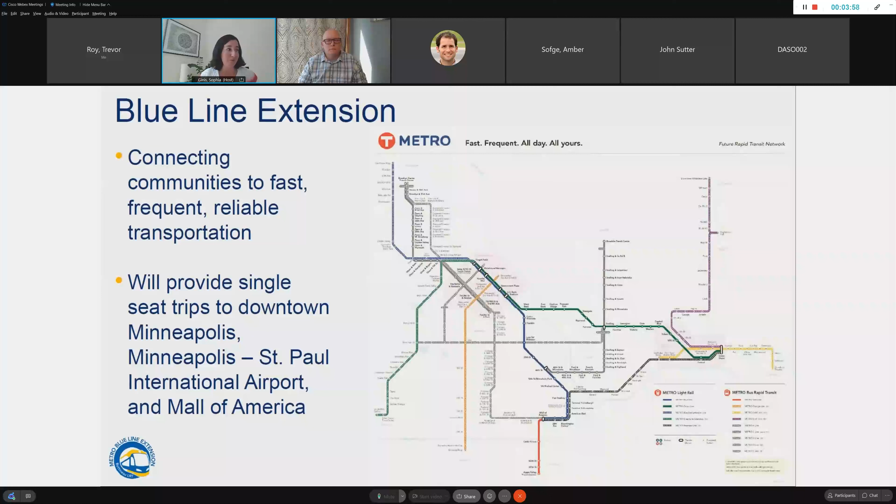Right now, we're in the process of identifying a community-supported alignment that'll take through the rest of the year. Beyond that, we'll continue to have many conversations with the community. We'll have an environmental process, develop construction-ready design plans, and do additional engineering. Then there'll be a few years of construction, 3 to 4, before we open the line. Our goal right now is 2028.

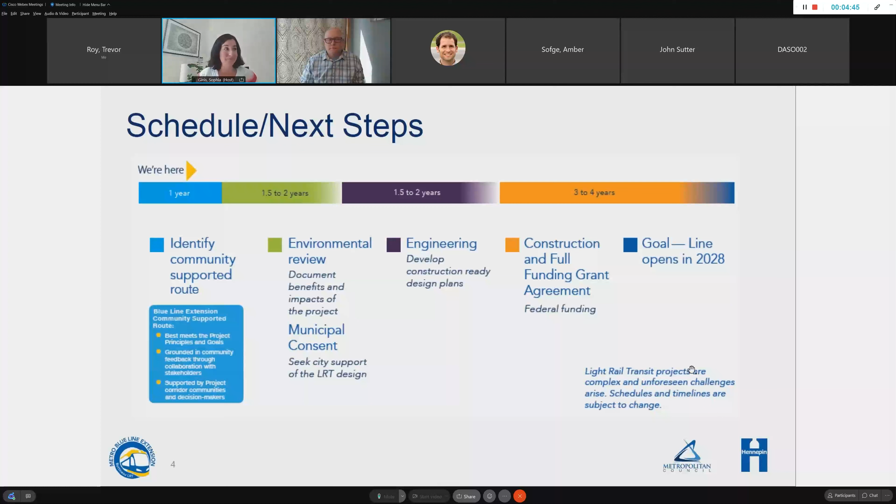So this is the beginning of a discussion to get into much more detail as we go. I'll run through a little bit about our proposed station locations before turning it over to Nick to run through our visualizations.

Just to put a little context right now, this is our first blush at the best locations for stations. We want to continue to have many conversations with the community as we specifically site these stations, and then we'll refine them as we further develop design and get into all the details of these stations and station areas. So expect ongoing conversations with us. As you see these locations, ask: do they feel right? Is there anything missing? That's part of the discussion we're reaching out to community for today.

So the stations that I'm about to show, to site them, these are some of the things we took into consideration: previously planned stations, feedback from community stakeholders. We have an interactive map online, and people gave us a lot of locations they were interested in. Obviously key destinations, something we've been asking about for some time. And then spacing - light rail needs some spacing between stations, half a mile to a mile, and figuring out how all of that fits together.

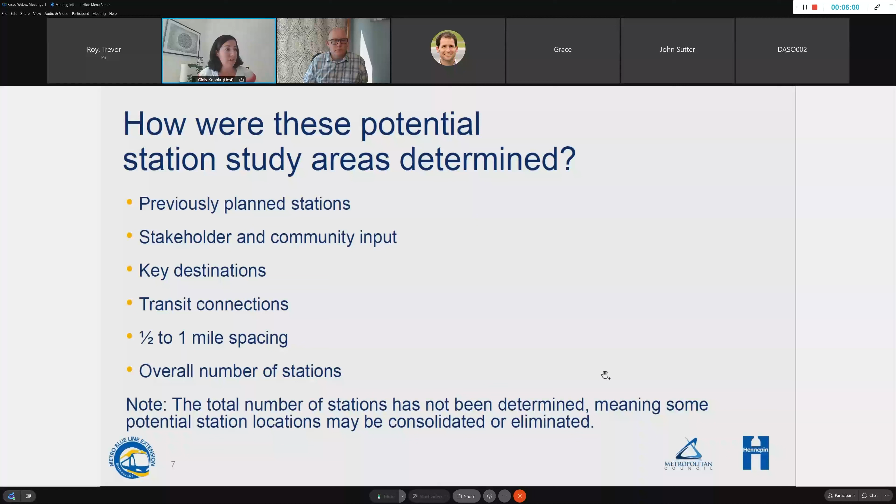So with that, in Brooklyn Park, basically our stations as designed can remain. There are 4 stations that were part of the previous project that can remain part of our current version of the project: Oak Grove, 93rd, 85th, and Brooklyn Boulevard.

As we get into Southern Brooklyn Park and then enter Crystal and Robbinsdale, the previous alignment here is in gold, and we can stay fairly true to some of these station locations - serving a major park and ride at 63rd, a vibrant business district in Crystal, as well as downtown Robbinsdale.

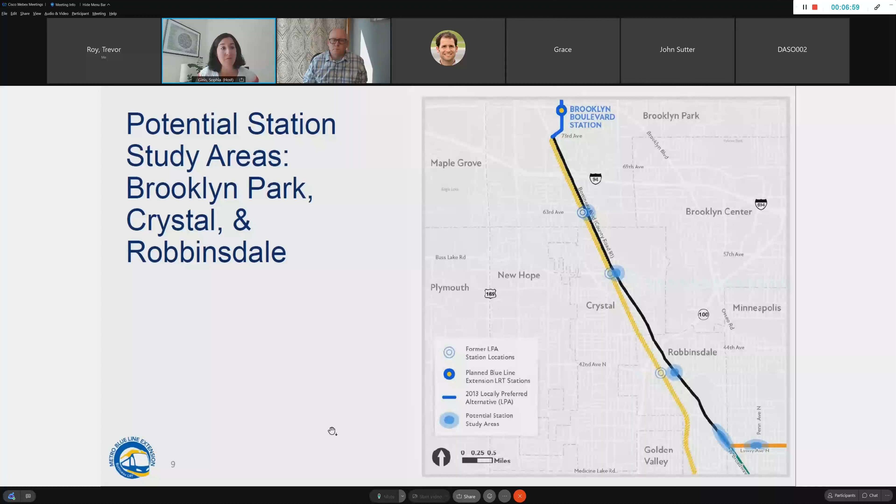One of the things we heard the most in our past project was the desire to serve North Memorial Hospital, a major destination for both hospital services and clinical services. This station at the southern portion of the line really connects folks to that amenity and to that regional destination that many people are going to, both in terms of employment and services.

Getting into Minneapolis, we have 2 route options. One is along Lowry Avenue to Washington, and another is along West Broadway with various linked options of how we would travel to West Broadway from Target Field.

There are many places that help us connect, thinking of both the C line and D line connections, as well as where these stations are placed, which tend to be very big business hubs within the neighborhoods. So thinking of where people are going, where they want to get, and the best places to potentially place stations - that is the same when you get down to the Plymouth area. There's a little hub of services and businesses and awesome places to go.

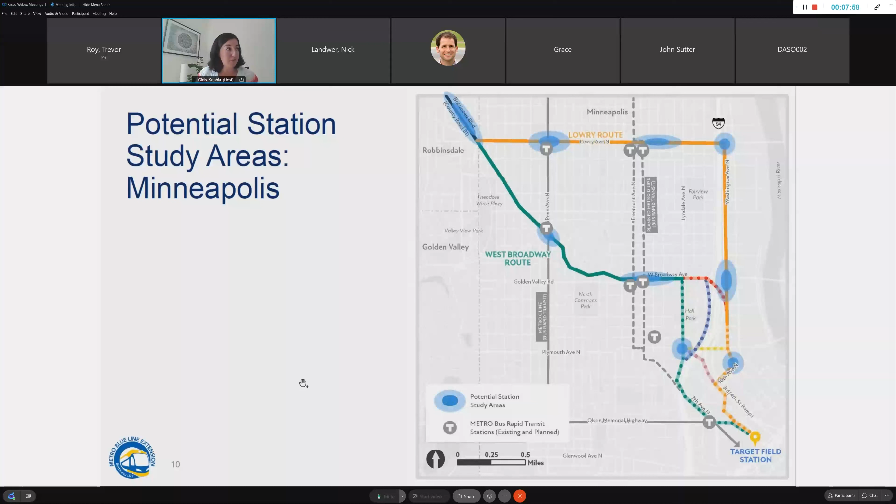With that idea in mind, this is what we're putting forth first to get folks' feedback on. As we move forward, we'll weigh these station areas against our project principles and goals. There are a line of things that help us guide our overall work, including continued public engagement.

Obviously, engineering plays a factor, like we need kind of tangent track to place a station. They're about 300 feet long. And obviously, the population's destinations and job access is one of our number one things. We also look at available right of way and where we can place stations to have the least amount of impact for the greatest positive impact, and what future land use might be around these stations. So as we place them, we kind of place them in areas that have a little bit more density and could continue to in the future.

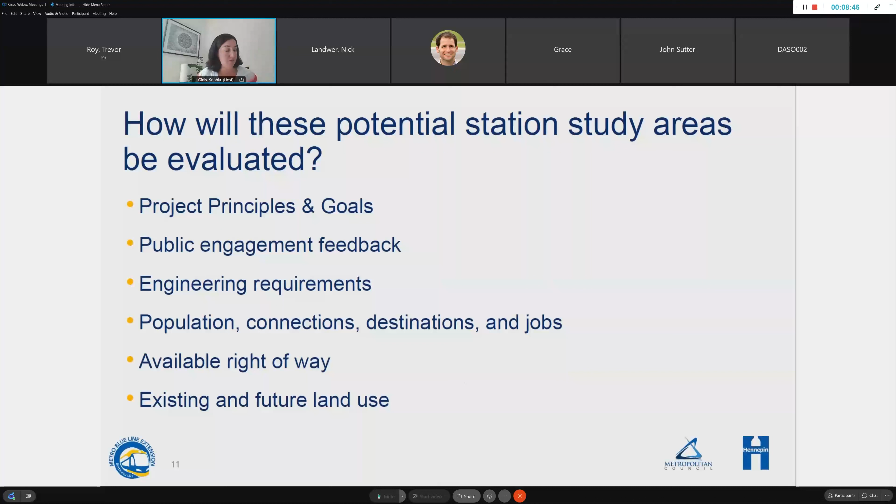All right, well, thank you, Sophia. My name is Nick Landwer. I am with Metro Transit and the Metro Transit project lead for engineering and design on the project. So I want to walk through the LRT visualizations.

We have two different sets in Brooklyn Park, as Sophia mentioned before, with the station exhibit. We have stations that are already designed. We're at 90% design, and in that area, 4 of the 5 stations are in that design area. As we get down into 63rd, that station will have to move a little bit out from the railroad corridor into County Road 81, and so we need to analyze how that operates and fits within there.

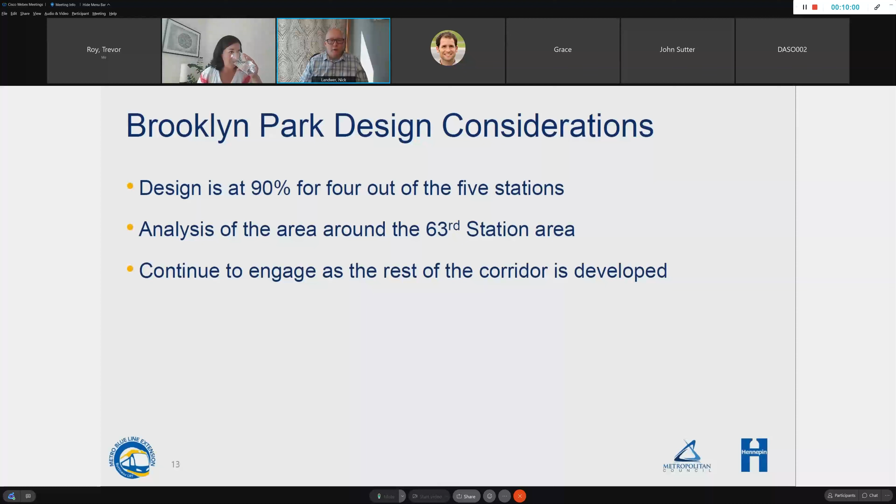And then also with Brooklyn Park, as we're looking at options farther south through Crystal, Robbinsdale, North Minneapolis, we still want to engage with the public on Brooklyn Park and talk about the project as we have it designed at this time. So next slide, please.

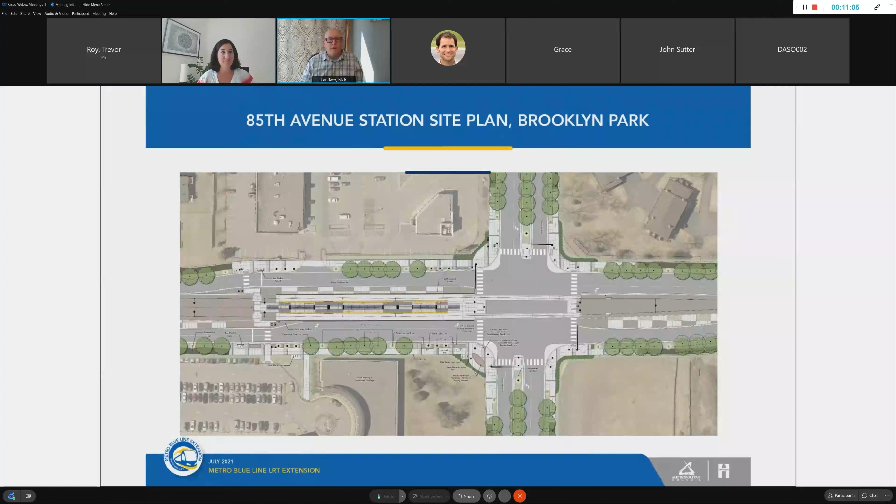So at the station, as with all stations, we like to have center platform stations so they're consistent with the footprint. So the footprint is the same on most of them, so folks, when they get to the station, all the amenities are in the same place. As you walk up the ramp, the card readers, the Go-To card readers, the ticket vending machines are in the same place, the information, the signage, the interactive television screens are in the same place on these stations, so folks know where they're going. What we can do, and what's shown on this, is look at some of the architecture to make it fit within the existing community, to fit within that context.

So we can work on the roof facade structures to incorporate into that area where it's designed. Paint structures or paint on the platforms and colors on the platforms are some of the elements that help individualize each station. One of the things we also look at as we do this is the pedestrian and bike connections to the stations.

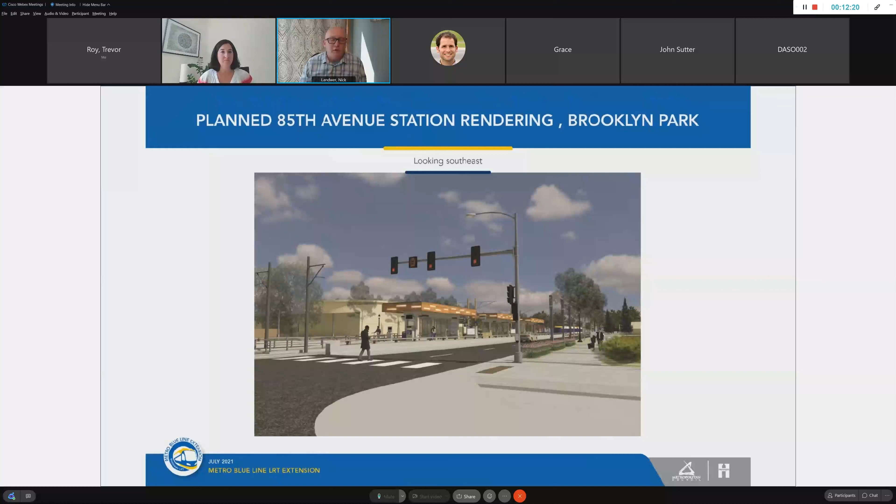How do we get our customers to them safely and efficiently? We really focus on, if we can, having the primary access for these stations at a signalized intersection, so folks, as you're walking to it, can push a button, get a pedestrian signal, and walk across to get to the station. Or if you're not going to the station but going across, you have that safe crossing and the potential for a refuge at that station area if you can't get all the way across.

Next slide. So this is the same station, looking from the south to the north. This is at North Hennepin Community College. So the benefit of this station area, not only do we have residential, we have a library on the north side of it. We're right adjacent to North Hennepin Community College with this, and there's some commercial shopping area and restaurants also in this neighborhood.

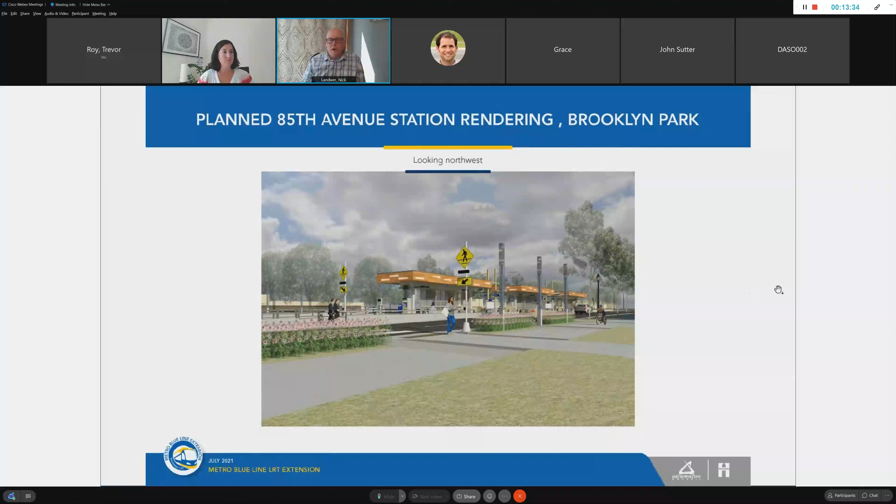On the south end, this shows our secondary access to the platform for pedestrians. So although it's not at a signalized intersection, as folks are wanting to cross the road to the traffic, there are flashing beacons for the crosswalk that the pedestrian can push to get that recall and get over to the station platform. Part of the station platform too, as we get to it, is we have boxes in there that direct pedestrians as they're crossing the tracks to look in the direction of travel of the train, so we have that positive visual confirmation of where the trains are coming through. So this is all an effort to make these as safe as possible.

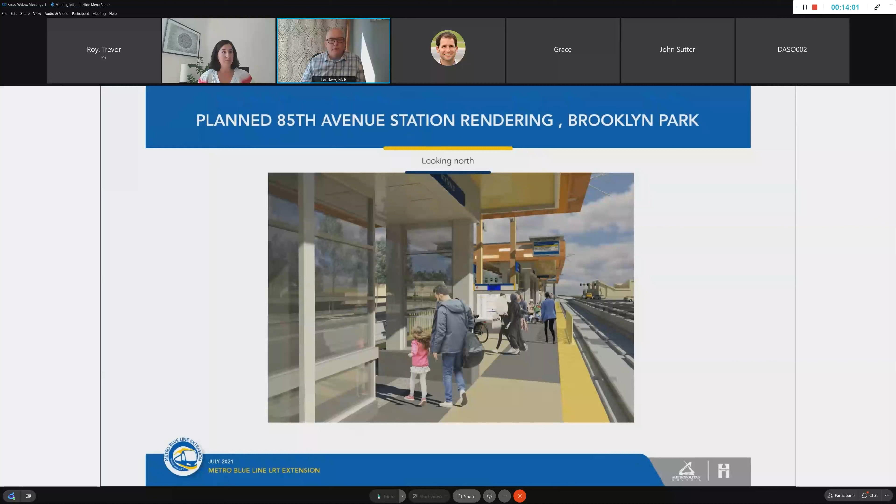Next slide, please. Just another visual showing how the platform itself operates, with televised announcements, kiosks to look at schedules, and protection from the elements with some wind screening and roof, if it's raining or snowing in these locations.

As we move down the alignment, this gives us a little bit more leeway. We'll have visualizations that are a little more conceptual, because we're moving off of what the last alignment, our previous alignment along the Burlington Northern Freight Railroad, was. We're moving into County Road 81, so we want to take a look at and confirm that center running at-grade alignment for light rail is the best option going forward through this area.

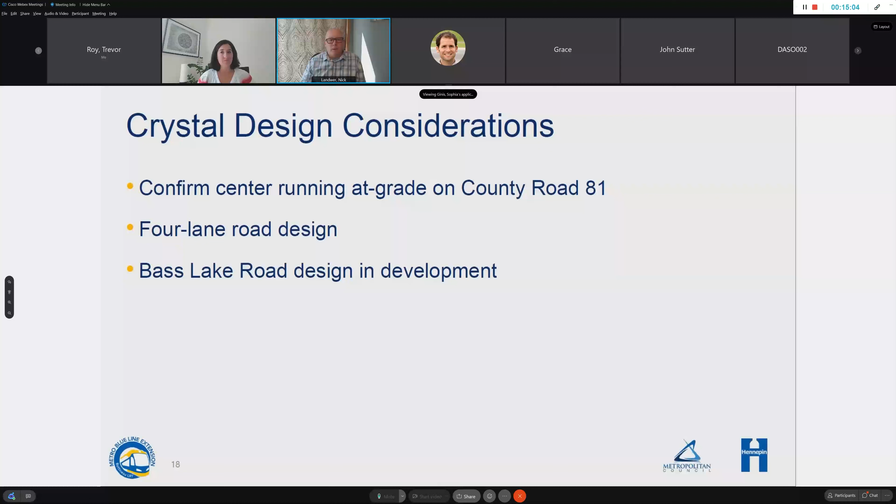We're evaluating a 4-lane road design on most of County Road 81, and we know that Bass Lake Road is a key intersection in this area for Crystal. We're looking at how to make that intersection operate most efficiently, and we're also looking at a station in that location.

So we do have some visualizations. I want to point out that in this location, we're not at 90% anymore—we're back down into that 5-7% design level. We're going to show graphics of existing conditions along the route, route options, and what center running light rail could look like. They're not very detailed as far as specific widths for road and sidewalk, and we haven't spent much time on landscaping or hardscaping. We really need to dive into how intersections fit in and operate through here.

But these give a good visualization so people can understand how light rail can fit within the existing corridor. All these visualizations are also on our project website, so I'll go through them fairly quickly, but if folks want to take a look, we have an interactive map where you can click on the camera to pull up these drawings and spend more time with them.

This visualization is of the existing conditions just south of Bass Lake Road—again, this is a visual concept. We're looking at 6 lanes total, with a center median, trails on either side of the roadway, and a boulevard on either side. In this condition, we have commercial on both sides, but directly adjacent to the west side of the road there is a frontage road.

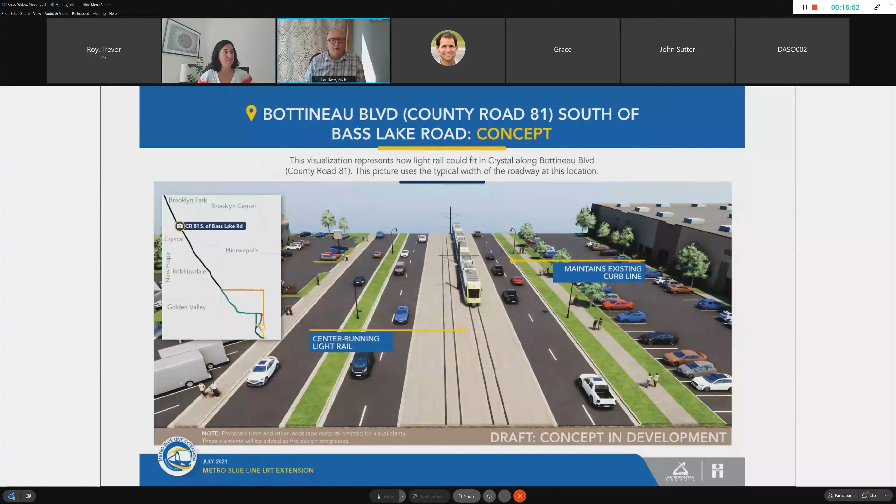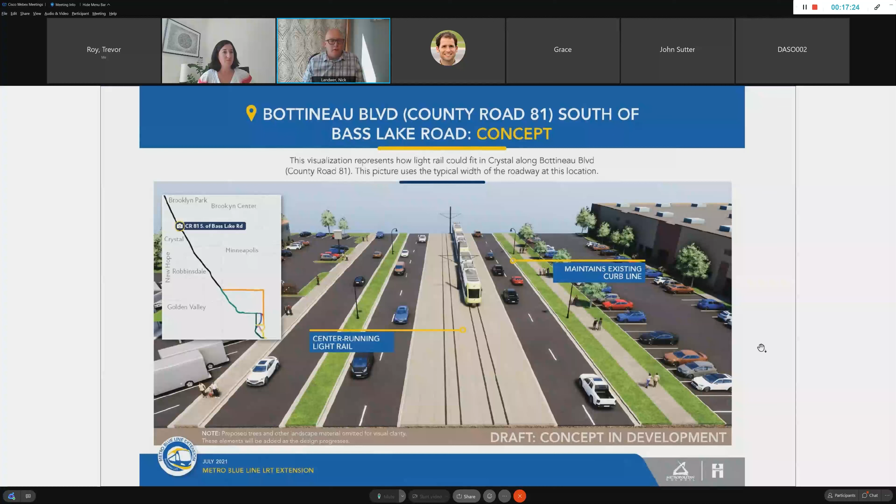This is a concept of how that center running alignment would look through here. We're showing a reduction, dedicating 2 of the 6 lanes to light rail, with 4 lanes remaining for traffic. So we have center running light rail in this area, we maintain the frontage road in this location, and we also maintain the pedestrian ways—the sidewalks and trails—on either side of the roadway.

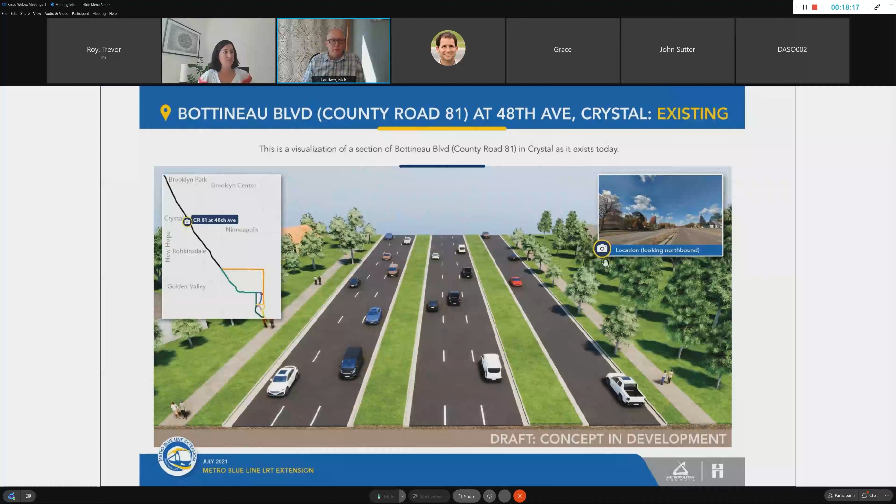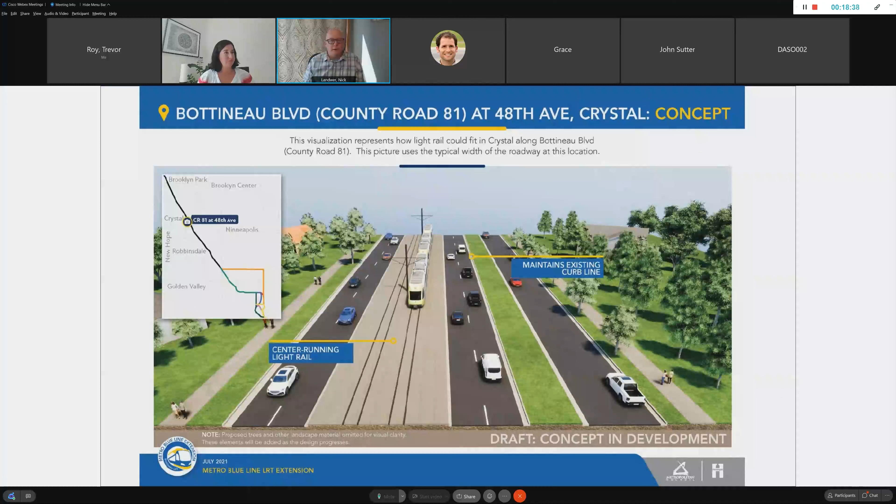Going forward, this is a concept of how center running light rail fits within this alignment with a 4-lane configuration. We can pretty much fit within the existing curb line of the roadway before, maintain the trails on both sides, and maintain the frontage road on the east side as well.

So moving down into Robbinsdale and some of the design considerations we're looking at here—again, we want to confirm a center running at-grade alignment on County Road 81 is the best option to move forward with. One key thing we want to look at as we go through the downtown Robbinsdale areas is maintaining the existing intersections, specifically at 42nd, 41st, 40th, 36th, and 35th, which are out there now.

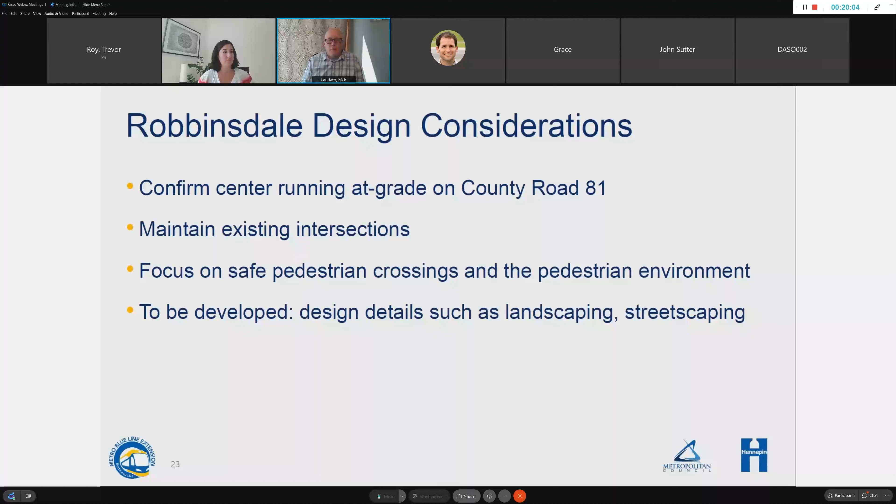They're all signalized, in full movement intersections, and our goal is maintaining those. We specifically want to focus on pedestrian safety in this area. As we're reaching out to the public and getting comments back, that is one of the big concerns at this area right now with the roadway going through it. As with all places, the higher speeds of traffic make it maybe not quite as pedestrian friendly as it could be. We'll strive in our design to improve those facilities and conditions the best we can to make it a safe and inviting environment, and hopefully pull that community together with the project and make it a good downtown area.

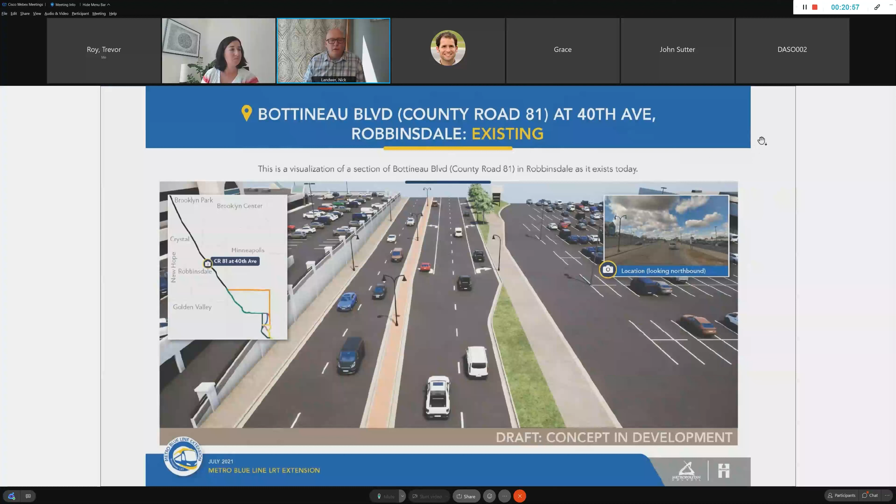Again, in this location, what we still need to develop along here with our concepts as we get farther into engineering is the green space - how we program it, landscaping, hardscaping, and things like that. This is again in Robbinsdale, off on the horizon on top of the screen is 41st. We're kind of over 40th, looking at this bird's eye view. We can see there's a retaining wall on the left-hand side with parking above it, and we know there's parking underneath that area. We have a sidewalk or trail on both sides with a narrower median, a full access intersection, and 4 lanes of traffic. On the east side, we have a commercial mall with some parking areas.

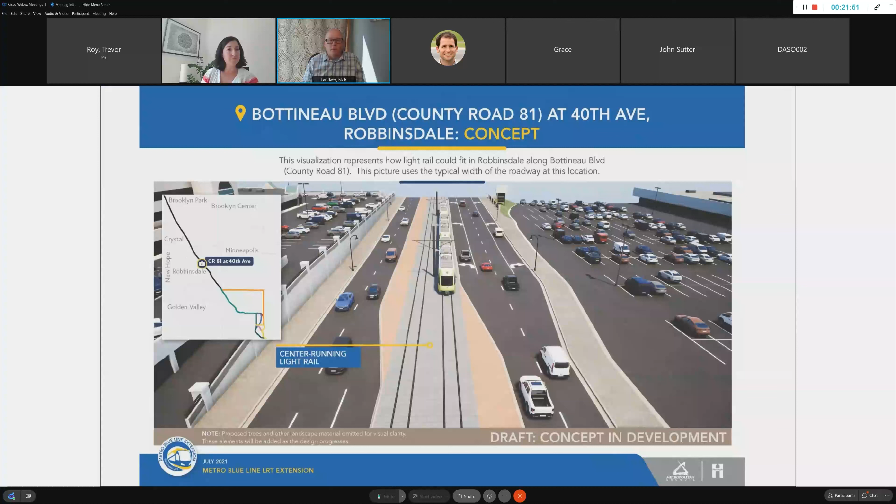So on this visualization, we show the center-running at-grade light rail going through here. We're able to work off of that existing wall on the west side, the left-hand side of your screen. We want to maintain that area and the parking there. We continue with the trail and have 2 lanes of traffic in each direction. We're able to maintain the intersections at 41st and 40th, and again a trail on the east side. There could be some parking impacts to that strip mall, and in all locations like this, we'll work with the property owners to mitigate the impacts this could have to them and the property, working forward to mitigate by either replacing or finding the best way to move forward.

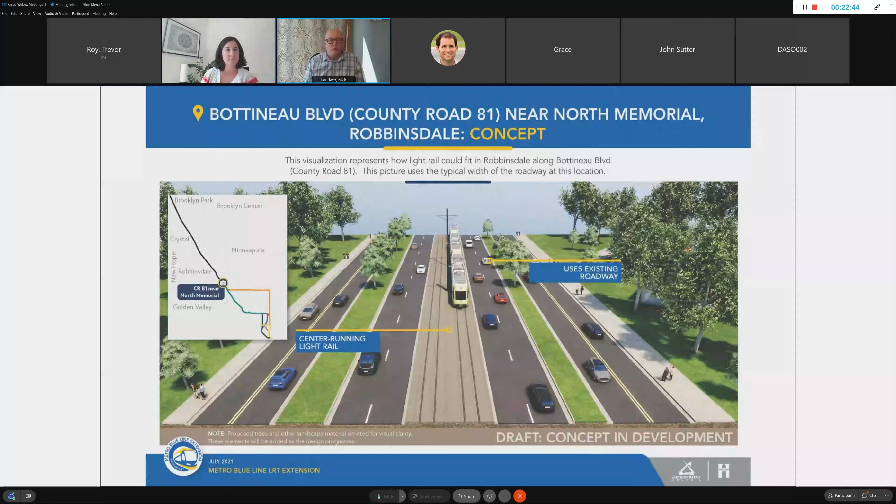As we move forward with our concept, this shows the center-running at-grade light rail going through the middle. We're able to maintain those 4 lanes of traffic. Obviously we're running where the center median is, but we're able to maintain boulevards on either side, the frontage roads, as well as the pedestrian ways through this area.

So we're going to move a little bit farther south as we get into Minneapolis, with a few more design considerations here, because as we get off of County Road 81, or as we're moving down it, we start having two different route options through North Minneapolis to evaluate and comment on. It's the Lowry Avenue to Washington alignment, or continuing on County Road 81, which turns to West Broadway in this area. So we need to determine the links, as Sophia pointed out in the map before, and how to get to either one of those route options, and how that'll function.

We do know that as we go through this area, there will be impacts to the on-street parking. There's a parking analysis underway, so we can develop a toolbox of how we mitigate for that. We know that if we're disrupting that parking or taking it away, we need to work with the community, business owners, and property owners to evaluate the potential of maybe district parking, look at options for side street parking, or for each specific property, if there's a way we can mitigate for them if there's room in the alley, and also look at how deliveries and things like that are handled along the alignment.

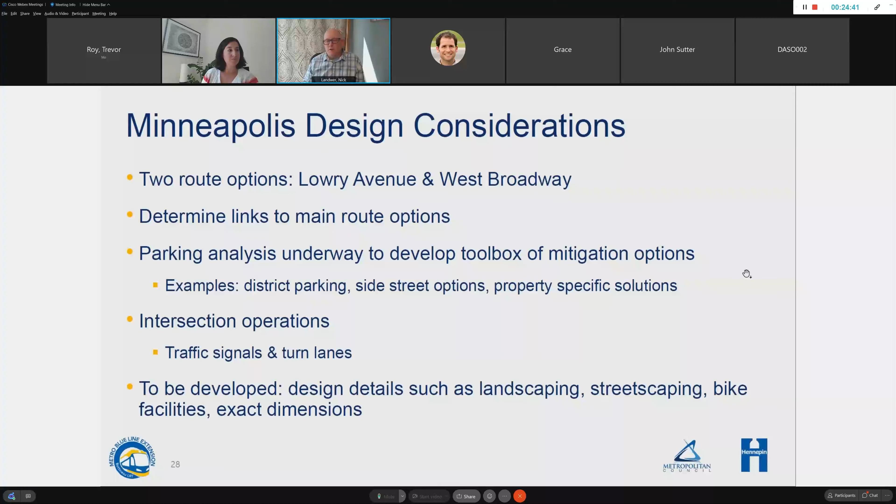We really need to start looking at the intersection operations, how the traffic signals work, and how the turn lanes fit within that. So we need to develop details on these designs such as landscaping and streetscaping. We know there are bike facilities along these corridors, so how do we accommodate for those? As we move forward, engineering the exact dimensions of lane widths and the sidewalk zone are to be determined, but these will show how those can fit within there.

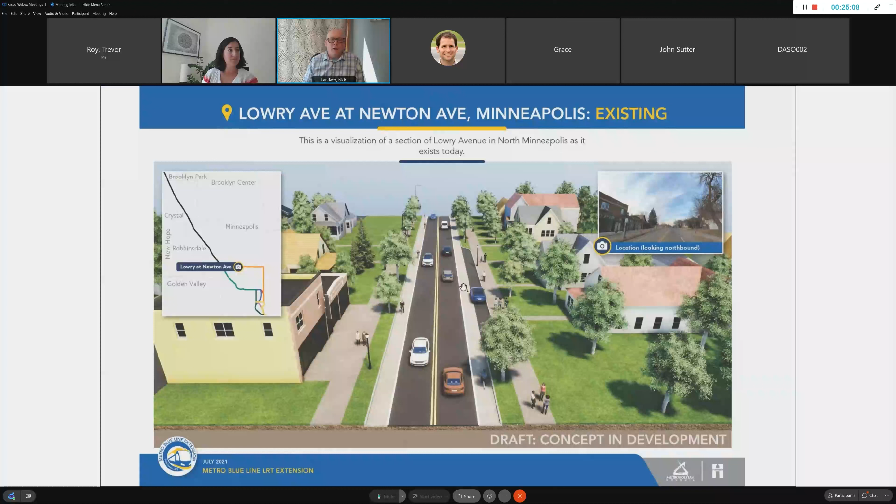This is along Lowry Avenue at Newton. This is typical of most of Lowry Avenue, where it's a two-lane road, one lane in each direction. We have a bikeway on the outside of the travel lanes there. There are some areas for off-street or on-street parking, as well as sidewalks on either side of the alignment. This shows more of a residential commercial area, and this is how light rail fits within that corridor, center running.

This option shows continuing one lane in each direction, on either side of the light rail corridor. We show a concept of what's called sharrows, where bikes and cars are sharing the lanes. There are other options we need to look at - this is just one of many for how we accommodate bikes in the area. Moving forward, we have sidewalks on either side, and we can see it moves the front footprint out a little more with the light rail in this segment.

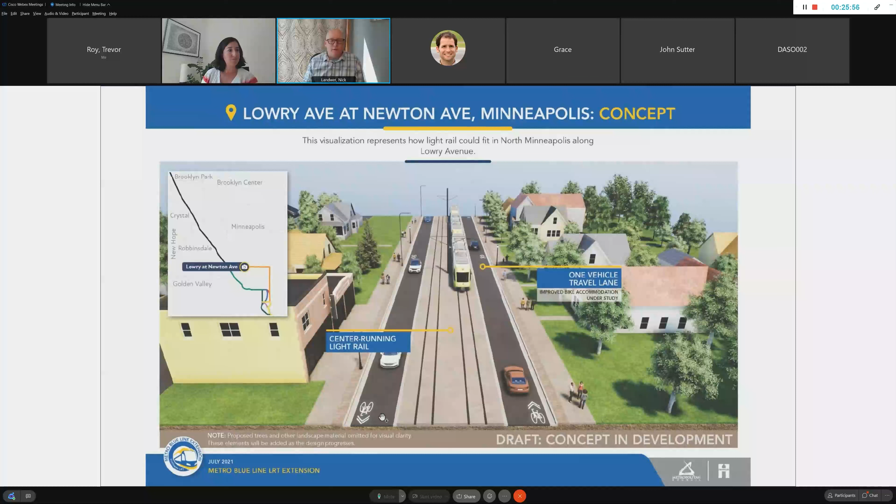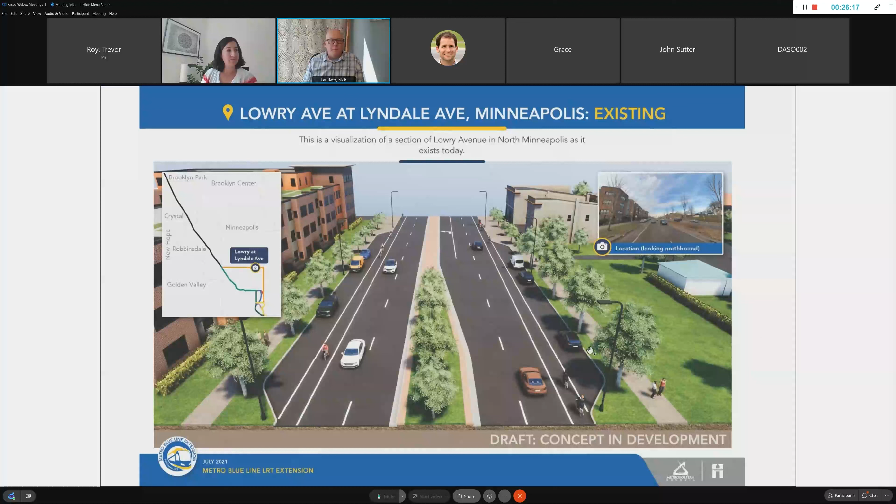Moving along Lowry Avenue, as we get closer to Lyndale, there's probably about 5 or 6 blocks that are 4-lane through here, with parking and a bike route on either side. There's a larger median here, and sidewalks on either side. This is how the center running light rail would fit through there, maintaining the 2 lanes of traffic in each direction and fitting bike lanes within there. As things push out a bit, there are probably impacts to parking in this area, but we maintain that sidewalk, the pedestrian ways on the outside.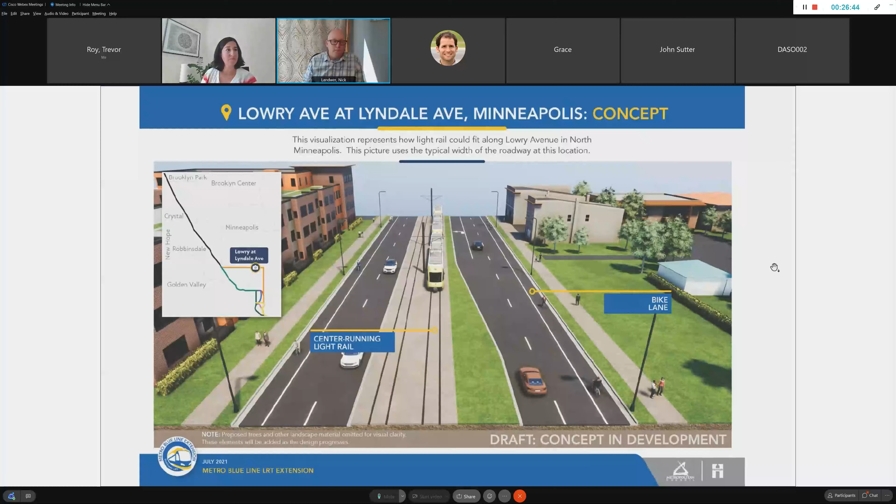Moving over to our other route option, West Broadway. This is a visualization at Queen Avenue. The existing condition is basically a 5-lane roadway, with 2 lanes in each direction and a center turn lane. Sidewalks and pedestrian ways are on either side. We have more residential in this area, with single-family homes depicted on one side, and maybe higher density apartments on the other side of the roadway.

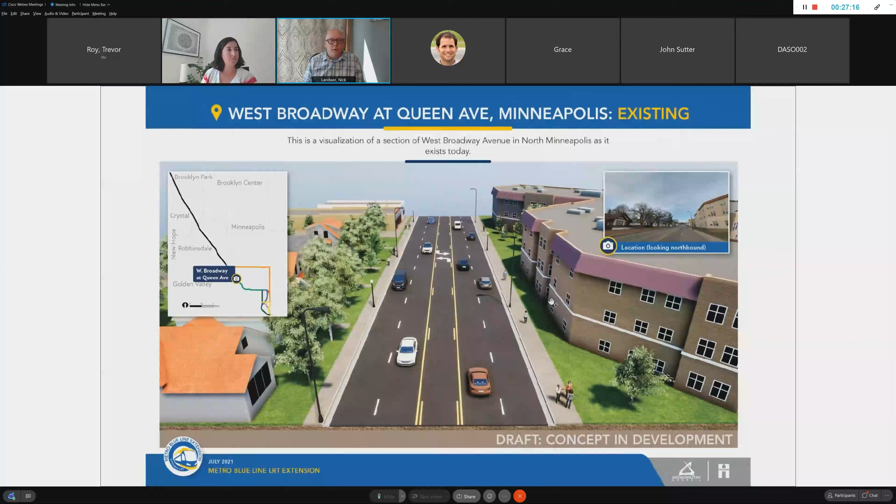As we come through with center running, we reduce the lanes down to 1 lane in each direction with that center running guideway, maintaining those pedestrian ways, the sidewalks on the outside, and fitting it through within this corridor.

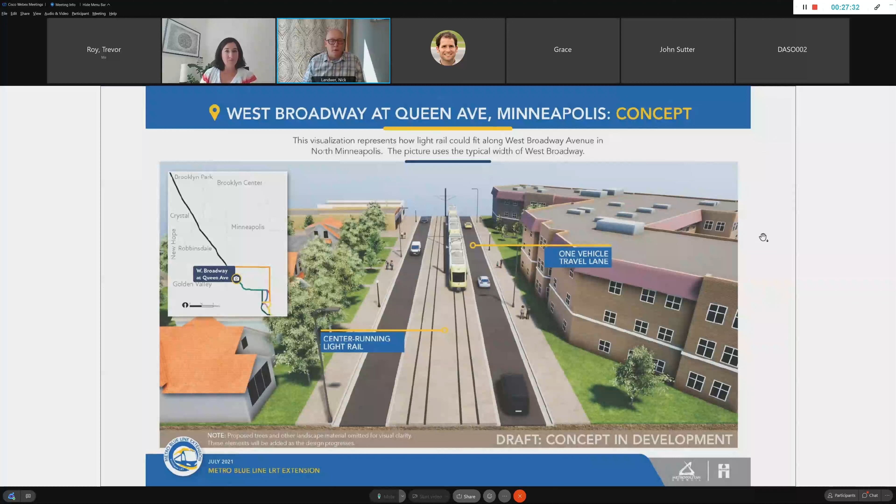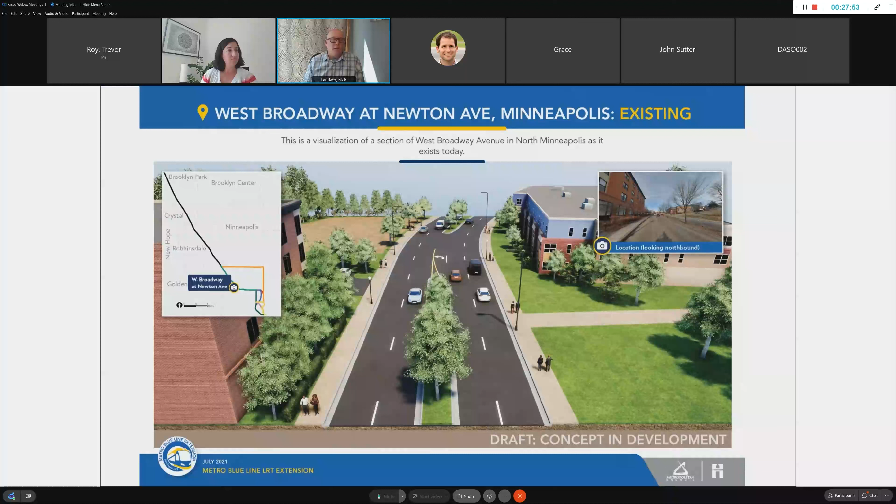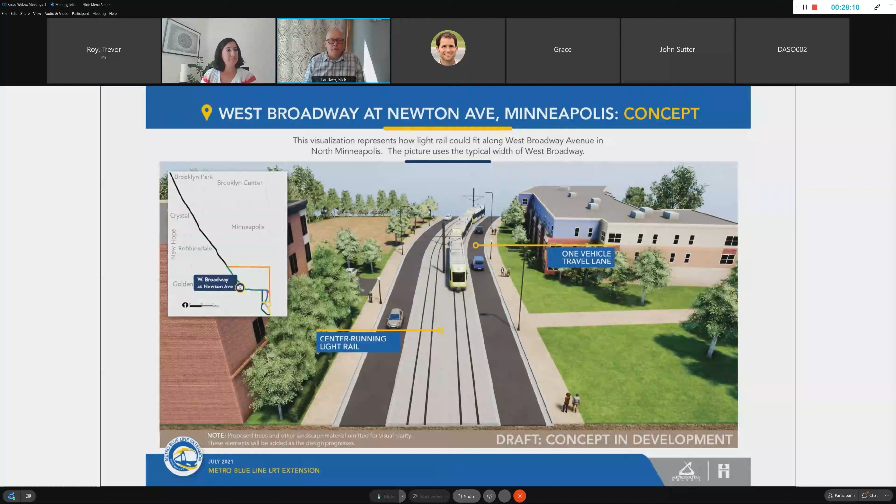Moving a little farther south on West Broadway, this is at Newton Avenue. Again, the existing condition is a 4-lane road through this area with a center median, and a sidewalk directly adjacent to the roadway on each side. This is with the center running LRT - we're reducing it down to 1 automobile travel lane in each direction, with that sidewalk still adjacent to either side of the roadway.

A little farther south, this is more where we get into the commercial areas of West Broadway. This is at Emerson Avenue, looking northwest. There are 2 lanes of traffic in each direction, on-street parking here, sidewalks on either side, and basically we're built out face to face of buildings in this area.

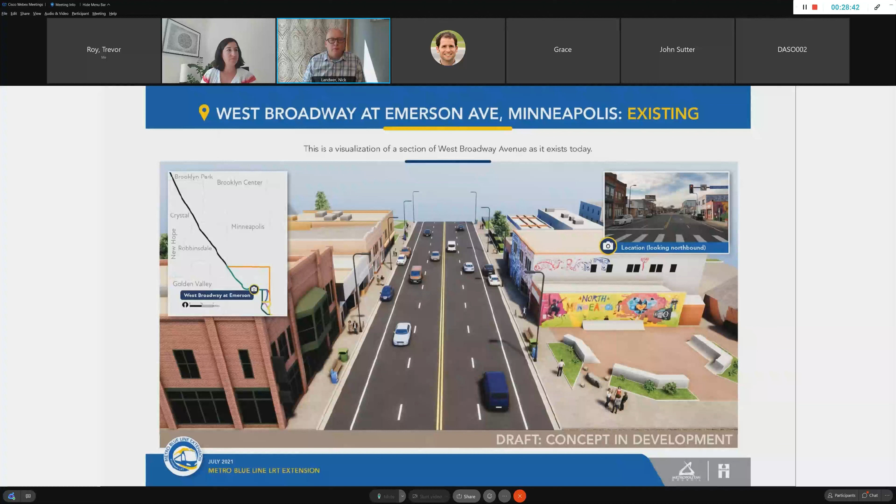As we go to the next one with center running, again we reduce the lanes down to 1 lane in each direction of travel. The parking does go away in this, but we are still able to provide good pedestrian zones on either side of this guideway.

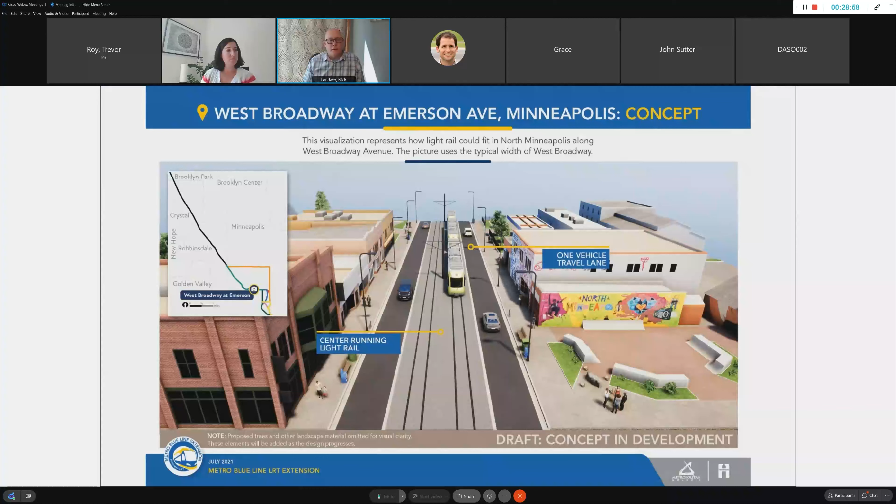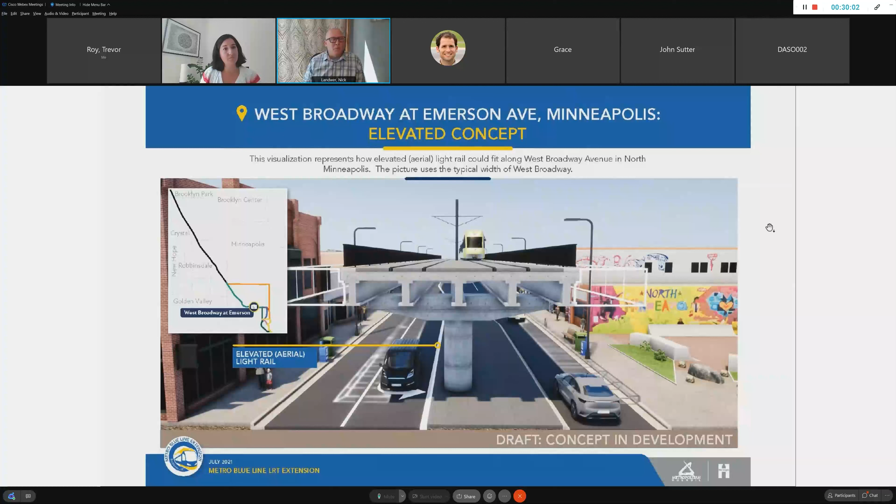So it doesn't help us out substantially with getting back more room in the roadway.

The next option here is another one that folks suggested: let's take a look at side running. Maybe we can give a little bit more room to the automobiles on each side. Maybe that'll make it more efficient.

One of the key concerns with the side running concept is it really does have an effect on all the connections that come into it. Anytime we cross the guideway with vehicle travel on it, we need to signalize that crossing for safe movements and provide left turns through there. So if it's not a signalized intersection today, we have to look at how we would maintain alleyways and driveways. It really starts having a lot more impact on those with side running, and pushes the guideway more to one side of the road than the other.

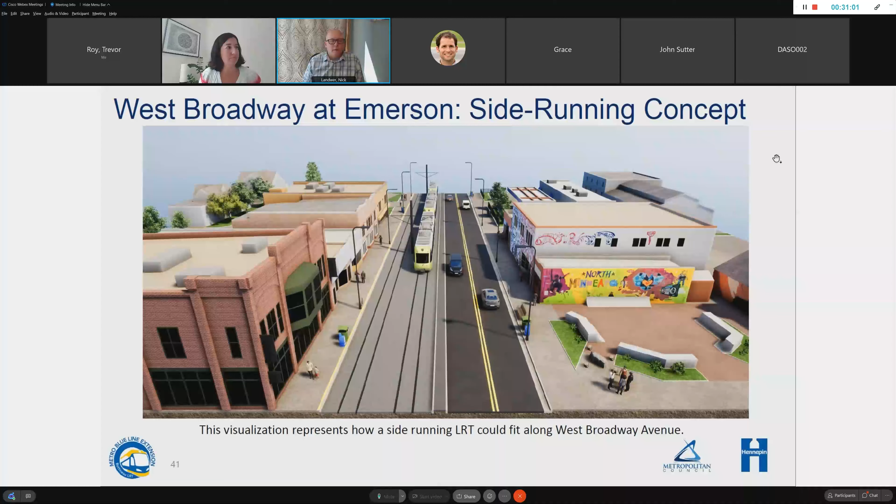As we're closing out the presentation portion of this meeting, I want to touch briefly on some of the work we're kicking off for anti-displacement. Through this project, we really want to maximize the economic benefit of the LRT and ensure that the changes benefit the residents currently existing in the corridor, providing opportunities for equal housing, employment, business development, cultural experiences, and daily life. We heard from the community that we should get into this work right away.

So we definitely are doing that. We have a request for proposals out on Hennepin County's website, looking for a facilitator or group of folks to help us kick off this conversation, looking for implementable policy solutions that'll take us through this project and potentially beyond. We're just at the forefront of gearing that up. We'll probably have these folks on board in September, but if you know anybody interested in the work, the proposals are due on July 27th, so there's a little bit more time, and we'll look forward to getting into more conversations with the community on these topics in the coming months.